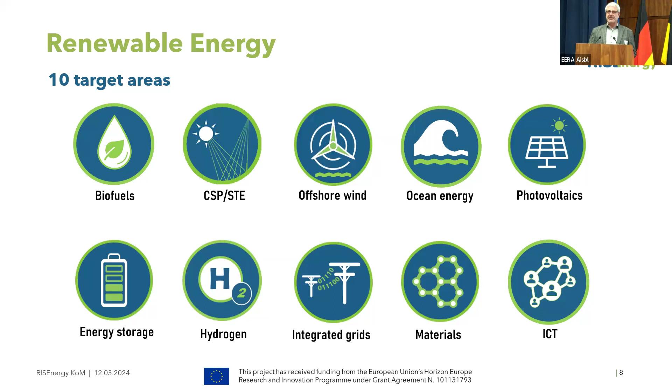There's not that much resources and budget foreseen for road mapping activities, as for example in other projects. So here we are challenged actually to spend this money and to make efficient use of our installations.

So with this project, we would like to initiate a more long-term coordinated effort, actually, with the aim to really scale up renewable energy technologies here in Europe.

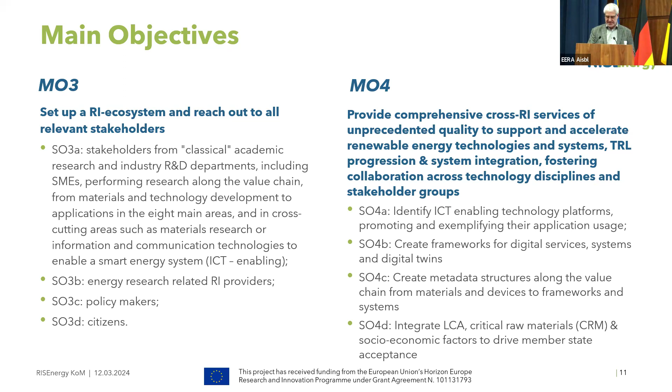Then also supporting activities are objectives 5 and 6, devoted to education and training. And finally, that group should become a kind of reference organization to guide the further development in these technology areas and towards the renewable energy system.

So how we have structured the project: we actually have objectives 1 and 2, innovation management and the user access, the transnational accesses, which are strongly linked, also supported by cross-cutting services in terms of ICT, but also in terms of best practices. Here we have a forecasting element, road mapping and perspective, and also it should guide actually the innovation activities where specific action is needed.

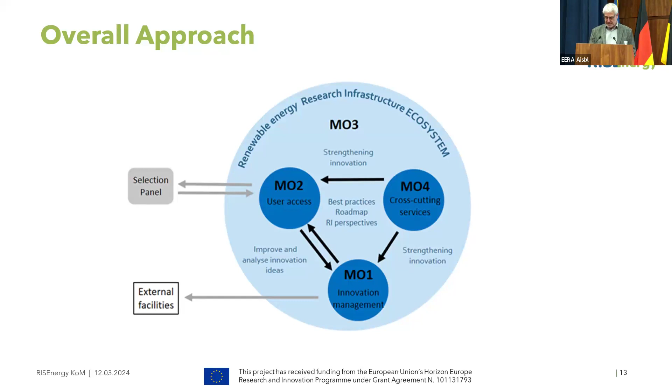Then we have this, which in total should contribute to objective 3: strengthening the innovation and creating the ecosystem. And by this, we have external layers. We have a selection panel from external experts, which help us select the best use cases and the best proposals for the infrastructure accesses. And we have an external advisory board guiding us strategically through our journey.

A little bit to the organization. We have participants, which are direct contractors to the European Commission. We have affiliated entities and subcontractors, and these are actually the participants receiving money directly.

Then we have an extended network, advisory board and selection panel as an outer layer. And here you see again the project core with the numbers here: 17 participants, 36 affiliated entities, and 15 subcontractors.

The subcontractors you see here to the different partners. With KIT as a coordinator, we take care of a bunch of subcontractors, and also AIT in Austria, IMEC and UCC.

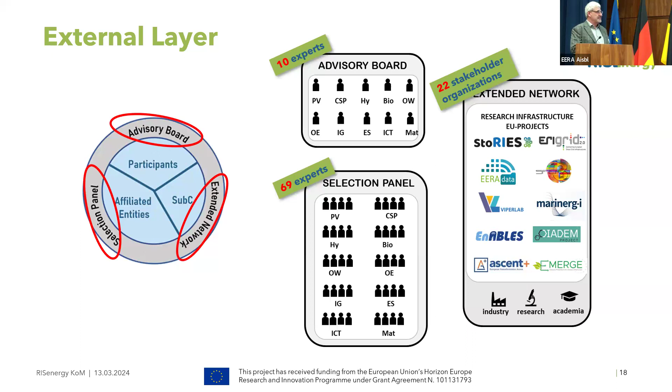And the extended network is a group of stakeholders who have actually expressed interest in following the project.

The management structure, just very brief. Of course, as each EU project, we have a general assembly of all the beneficiaries, the 17 partners. We have a steering committee, which is composed of the work package managers, but also the representatives of the different technology areas, so that we link the operational execution of the project to the content and the technology field.

Then the extended network provides input to the steering committee, and also the selection panel and the advisory board, to the overall project.

This is the RISEnergy project at a glance. And what we would like to do now is start introducing the research infrastructures from the different fields by having presentations from the thematic leaders of the different fields. But before we go to this, are there any questions on the general frame and setup?

We will also deal with this tomorrow in more detail, how we actually think of running that project. Unless you have comments or questions, then I would start to kick off now what I would call the scientific, technical, really content - the meat on the bone, I would say, of our project - that we move on to the research infrastructure presentations, task 3.

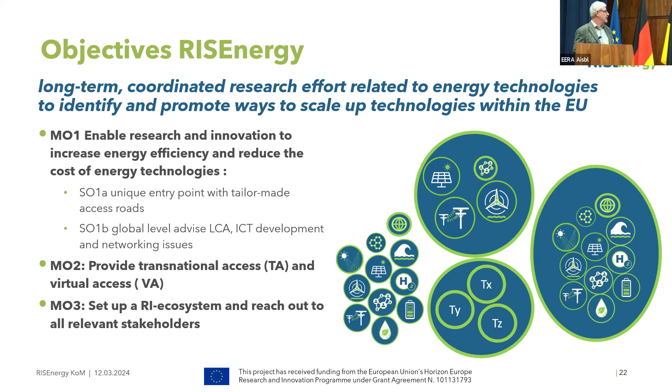So here are the different areas, and the first step of bringing areas and people together is actually getting to know them. That is the motivation for this afternoon, that the thematic leaders of these different areas - here are the 8 technology areas, but also the cross-cutting issues of materials research and development and international infrastructures - present what is in our catalog of infrastructures, not going into each installation or unit, but summarizing the main challenge in the field and how these infrastructures could contribute to solving them right now. Also as a kind of inspiration for the coffee breaks and the networking dinner this afternoon. I hope you take this invitation and actively participate in developing this understanding further.

So with this, I hand over to the first topic. It's Ivan Gordon on photovoltaics.

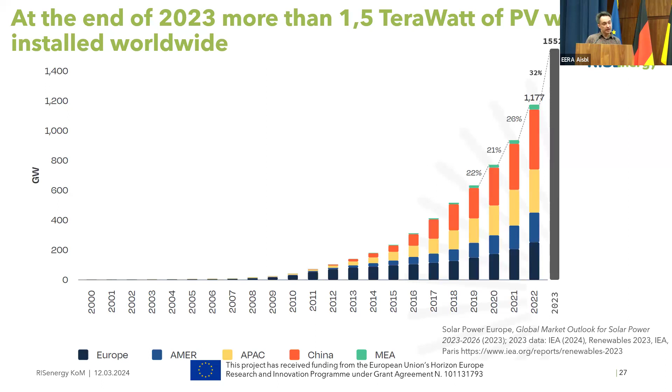And that has, of course, led to massive installations worldwide. Here you see, as a function of the year, the total amount of PV modules that were installed worldwide, so the total capacity. We see that at the end of 2023, worldwide, there was around 1.5 terawatt, so 1,500 gigawatt of PV capacity active. You see that especially in the last years, this increased very rapidly with rates of 20 to 30% extra installations per year.

If we look at the technology behind these PV panels, we can say that currently around 95% of PV panels are based on crystalline silicon - meaning crystalline silicon wafers as the active absorber material. The other 5% of PV modules are based on so-called thin film alternatives, where instead of crystalline silicon, you use, for instance, cadmium telluride or copper indium gallium diselenide. But in this project, we focus on crystalline silicon mostly.

And so now I will go through quite quickly a few of the main challenges we are still facing. Because often we hear people saying, okay, photovoltaics, it's very cheap, we already have a very large production, so it seems to be a mature technology - everything is probably already done. What is there still to do in terms of research? Well, there is actually quite a lot to do.

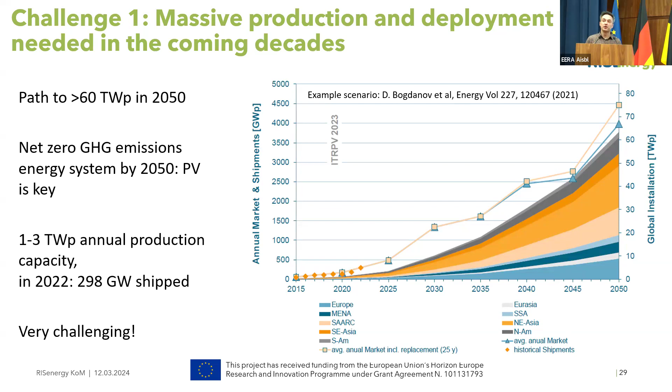The first challenge we are facing is that we have now around 1.5 terawatt of PV worldwide installed and active. But we know that to become climate neutral by 2050, or perhaps earlier, we actually have to go to 50 or 60 terawatt. So we are only at the start, and we have less than 30 years to go from 1.5 to 50 or 60 terawatt. That means the annual production, currently around 300 gigawatt of PV modules per year, has to probably go up in the coming years by a factor of 5 to 10, which poses a lot of problems, especially logistically, but also in terms of where we are going to install all these PV panels. Especially in densely populated areas like Western Europe, it's not always easy to find a lot of space.

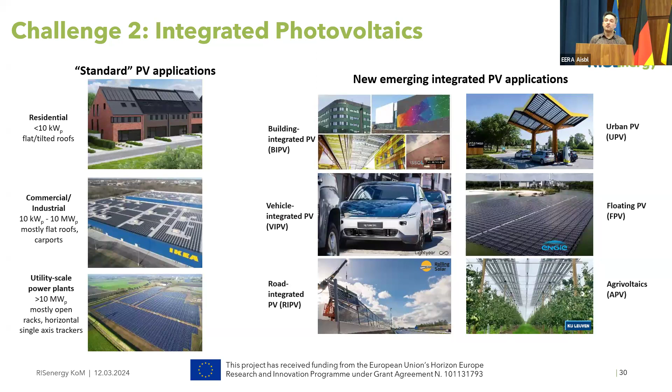Also something that is attracting a lot of attention is so-called agrivoltaics, where you combine agriculture with energy generation by PV. The main thing here is that you use a certain area for multiple purposes, including electricity generation. Then a third challenge, and this is really one of the main ones in my view, is sustainability. We have to start even more massively than what we are doing today, producing a lot of PV panels.

This poses a lot of problems in terms of sustainability and material usage. On the one hand, we have to think about recyclability. We can recycle the current PV modules, but it's still a difficult, complicated process that can also be expensive. So we have to think about, can we design our PV panels better in the future so that they are easier to recycle? But also we are consuming a lot of materials.

I give here the example of silver. A crystalline silicon PV module typically contains a few grams of silver, because of the metal contacts of the solar cells. A few grams doesn't sound like a lot, but since we are producing roughly 1 billion panels per year, this corresponds to thousands of tons of silver. At the moment, we are already consuming around 15% of the total silver produced per year just for PV alone.

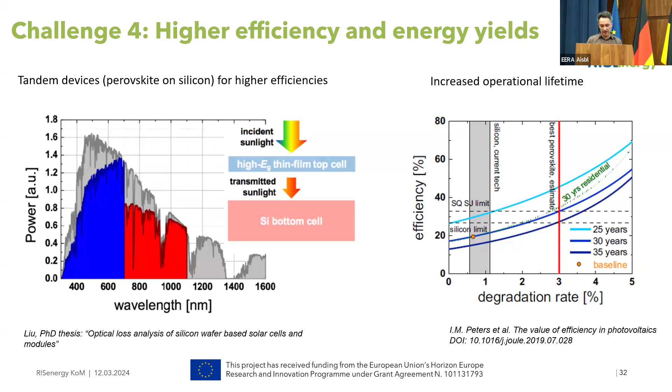Of course, we also have to look at the operational lifetime. We have to increase the lifetime of the devices so that they generate more electricity during that lifetime. So both are needed, higher efficiencies and higher energy yields, to go to even further lower costs.

So how do we address that now in the project? We have 4 research infrastructures that are fully dedicated to PV, and also a few others which are cross-cutting, where PV is involved. With these 4 research infrastructures, we focus on crystalline silicon and cover the whole value chain, including going to the tandems. This will help speed up the necessary developments. Basically, with our research infrastructure, we can address these 4 challenges that I have just shown you.

So we can quickly go through them. We have 2 research infrastructures, one in Norway and one in Turkey, where we focus on the silicon solar cells. In Norway, we look at the material, the silicon material itself. There is still lots of room for improvements there.

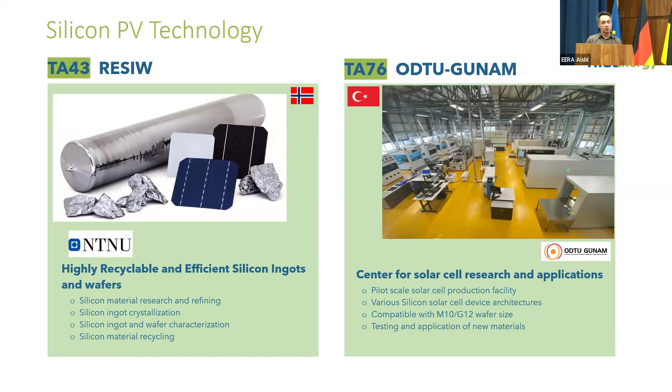And in Turkey, we have a very nice pilot line where we can make all kinds of crystalline silicon cells and even modules.

Then at Energyville here in Belgium, this is my own lab, we will focus on silicon-perovskite tandems, the next generation where we put a thin film perovskite material on top of the silicon to reach efficiencies above 30%.

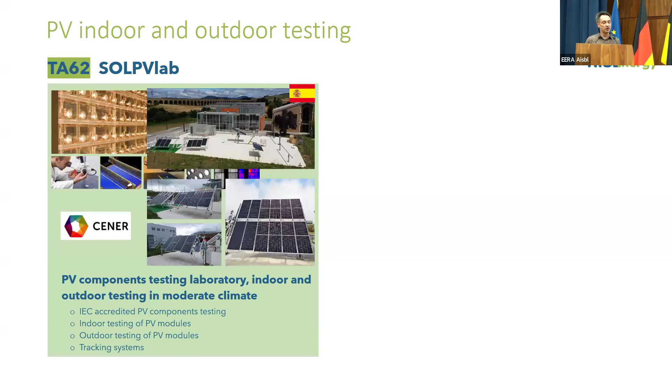And then we also have the SOLPVlab from CENER in Spain, where we have state-of-the-art indoor and outdoor testing, which is very important, especially for all the different applications appearing in the market. So that's a short summary for the PV part of RISEnergy.

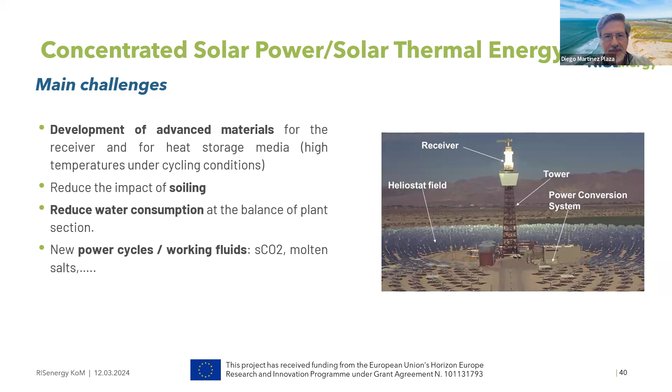We want to integrate this technology into industrial processes, so we need to improve the modularity and integrability with other energy sources.

The modularity has a reason. Normally for steam turbines, the bigger the turbine, the higher the efficiency, so these plants make sense going to big size, hundreds of megawatts. We need to develop modular technologies so you can build smaller plants without compromising global efficiency.

All in all, we need to decrease LCOE. We are aware that we need to reduce the operation and maintenance cost and the capital cost. At this point, we are at the beginning of our learning curve because there is not yet a mass deployment of this technology, so we have high potential to reduce capital cost. Last but not least, we need to improve reliability and performance.

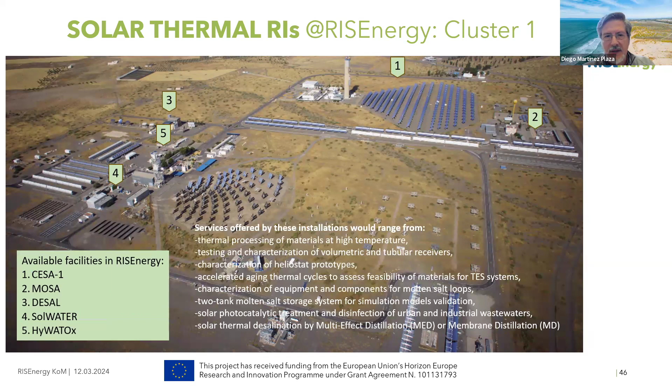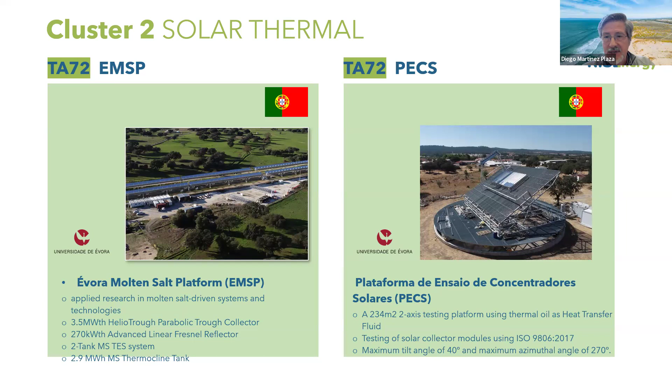At the IMDEA Foundation, they offer three facilities: the High Temperature Processes Laboratory for synthesis and characterization of solar materials, the Solar Simulator composed of xenon lamps, and a small power tower for testing receivers and processes. CENER in Navarra is offering a simulation environment for solar energy systems, relying on open source software called Tonatiuh, and a CST library developed on the basis of Modelica.

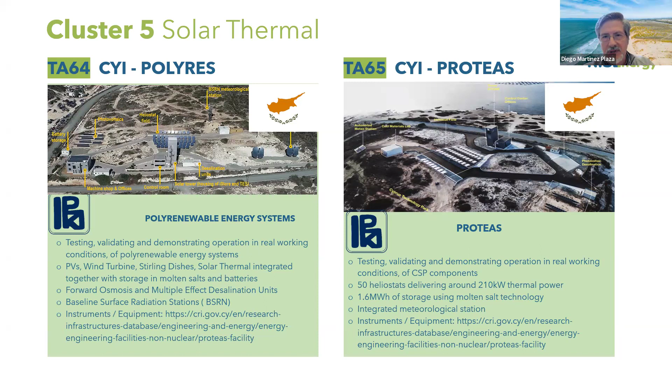In Cyprus we have two very interesting facilities. On one side, regarding integration with other renewable sources, PolyRes is able to test, validate, and demonstrate in operational working conditions poly-renewable energy systems, integrating solar thermal, photovoltaics, wind turbines, Stirling dishes, and also energy storage systems. It's a very interesting application. On the other side, Proteas is a typical power tower facility for testing receivers and applications.

There are also small solar furnaces for materials treatment and the study of advanced materials, and the MicroSol'R, a small parabolic trough system to study different components.

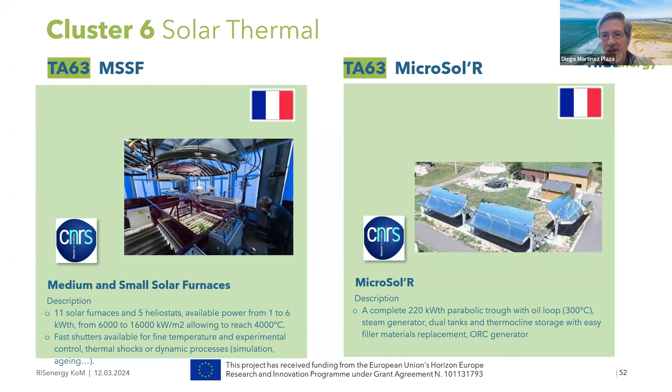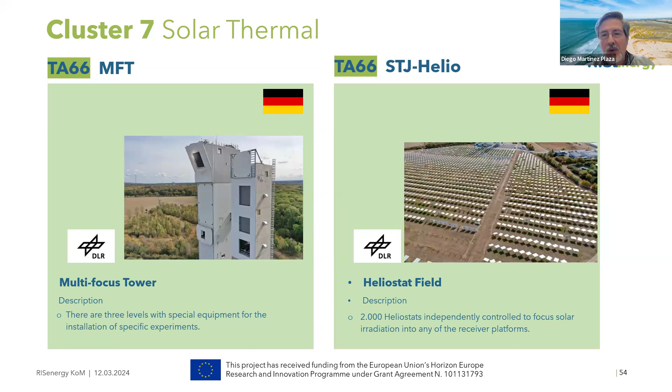The other tower, on the right-hand side, has three testing rooms and is able to test several experiments at once at different levels. The solar field has 2,000 heliostats, which deliver power to any of the test rooms in these two towers.

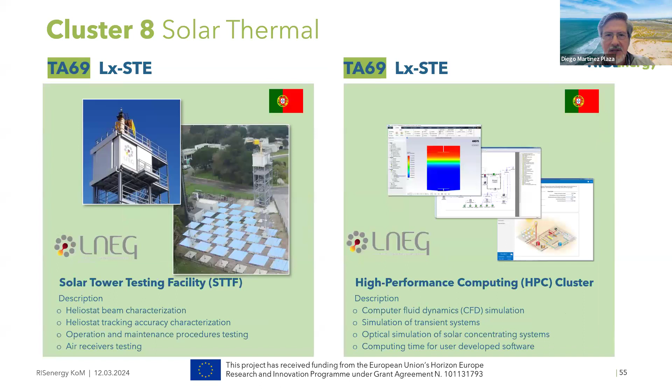And last but not least, the Portuguese partner, LNEG, is offering a solar tower for testing of receivers, a high-performance computing cluster for modeling computer fluid dynamics, particularly for the working fluids in solar applications. The last facility they are offering is the Laboratory of Solar Energy, where you will be able to carry out optical characterization of both reflectors and absorbers, work on measurement of solar radiation, and also the testing of solar collectors. That is the collection of facilities we are offering for access in the CSP STE community for RISEnergy. Thank you for your attention.

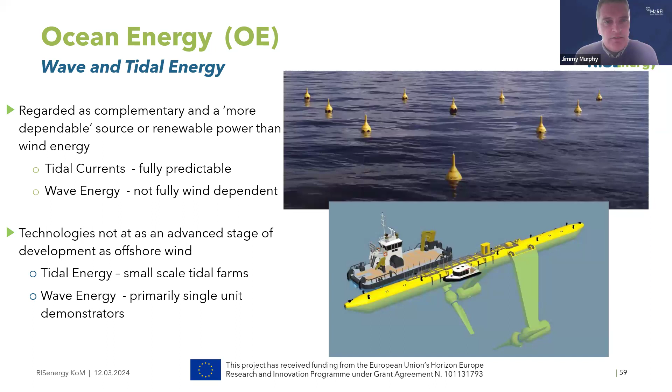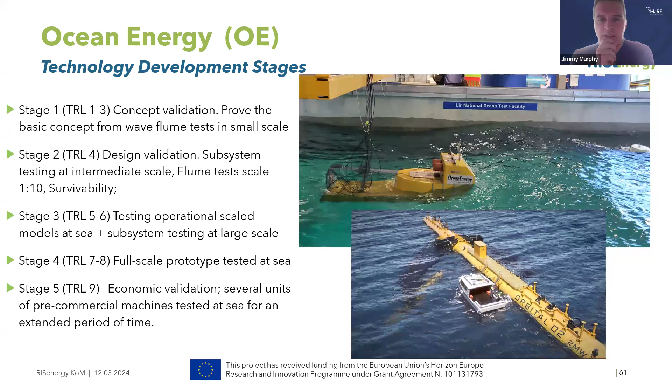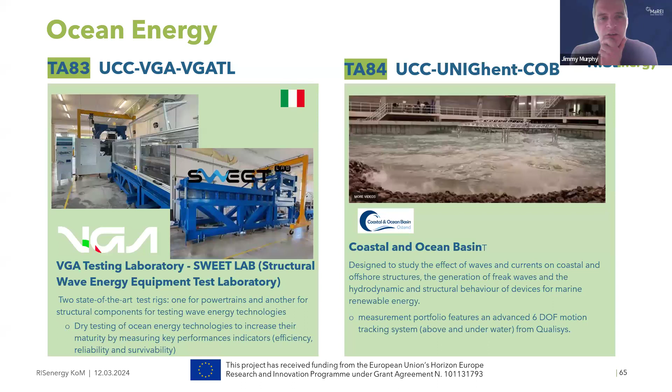So that covers everything in relation to ocean energy. I'm happy to take questions now or later. Thanks.

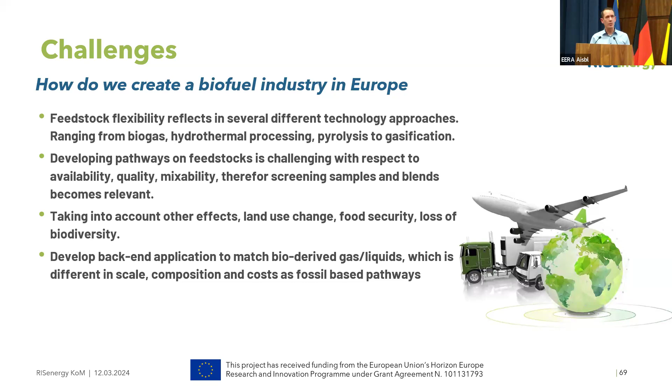Within our biofuel transnational access, we have 6 offers. There's also one international from NREL, but that will be presented later. We have LNEG in Portugal, we have TUBITAK in Turkey, the Netherlands at TNO, we have RE-CORD in Italy, and we have DBFZ in Germany. And I think through these 5 or 6 organizations, we cover virtually all possibilities of going from a feedstock to a fuel.

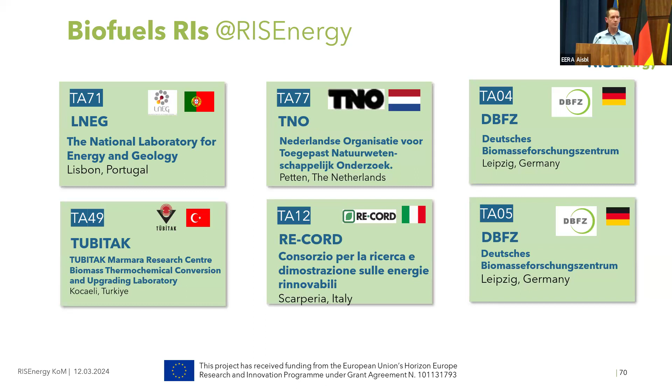So some details about these, what's on offer. For TNO, what we put in is really the gasification platform as a starting point to convert biomass feedstocks into gas, do the whole cleanup, test new catalysts, new sorbents, new liquids, and then go to fuels. And that's up to high pressure conversion, so we can do up to 100 bar, methanol, Fischer-Tropsch, etc. And also supporting this with extensive analysis.

For LNEG, they have the biomass and bioenergy research infrastructure, which is actually covering many different topics. So it's microalgae biorefineries development, where you can look into CO2 fixation, going all the way to biofuels, but also how to deal with wastewater, because this is a wet biomass. They also offer thermochemical pathways like liquefaction, pyrolysis, where you produce liquids which you can replace fossil liquids or maybe upgrade directly to fuels, and also gasification.

Another topic they look into is biomass deconstruction, so breaking biomass down into simpler molecules, using various approaches, high pressure ionic liquids, and they also have fermentation of sugars. And this is not the first generation sugars, but sugars that you obtain from lignocellulosic biomass, which is C5, C6 sugars. So all these different pathways are included.

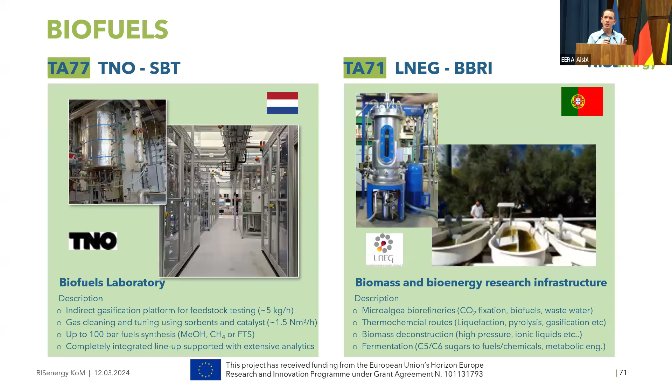Disintegration, again, is breaking down of biomass. They offer several batches going from small scale applications up to 100 liter units, and temperature ranging between 150 and 350 degrees C, so that's already quite severe. And they help you from proof of concept to experimental scale-up of carbonization technologies, liquefaction. So that's where you either go to biochar or go to liquids, or completely destroy the biomass with biomass disintegration units, and again, extensive analytical options. I think for all research organizations, the analytics are really dedicated to the work that we're doing, so that's also good to have.

TUBITAK is offering a fluidized bed and fixed bed pyrolysis and gasification setup. So this is more thermochemical conversion, higher temperatures, where you go to liquids or to gases that you then can further upgrade into fuels. They support you with an analysis department as well.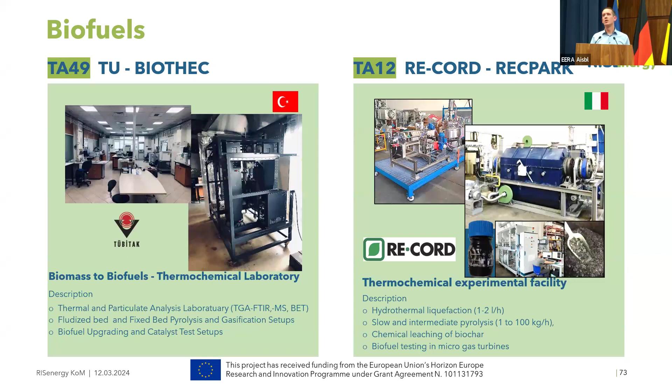So these 6 TAs that are on offer, they really cover the whole scope of different feedstocks. So you can use wet feedstocks and go to the partners, you can use dry feedstocks and there are other partners, but they can all help you to convert a given biological residue into a biofuel.

Oh yes, thank you. Okay.

So there's already a link shown to chemical energy carriers in the storage area. Now we move to the competitor of the previous presentation, offshore wind. Presented by Julian Balzen, is that right? Yeah.

Thank you. I think a lot of people are a bit surprised to see me because I'm not a scientist. So, but I think, as I understand, maybe Anthony Fraisse is online from DTU, my dear French colleague. So maybe he can support me if I say something wrong or not really precise. So please be indulgent with me.

So, offshore wind. I think I need to use this... yeah, the pointer, perfect. So let's back up a little bit.

Let's take some history. In 1991, the first offshore wind turbine was built in Denmark, which was quite a groundbreaking project at the time. That's 33 years ago right now, so maybe some of you weren't born. No, I think yes, I was born too.

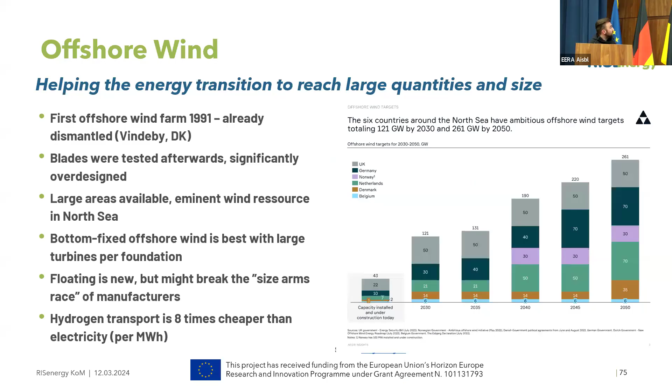To scale up turbine manufacturing, we also have to improve manufacturing processes, optimize supply chains, and of course reduce material waste. For that, collaboration between stakeholders and governments can facilitate the development of standardized components and streamlined manufacturing techniques. Second, there's installation for offshore wind farms at larger scales.

As turbine size increases, the logistical challenges associated with installation increase too. So we need to find innovation in installation methods - for example, advanced vessel technology, automated assembly processes, and investment in port infrastructure will be important, along with skills and labor training to support the growing offshore wind industry.

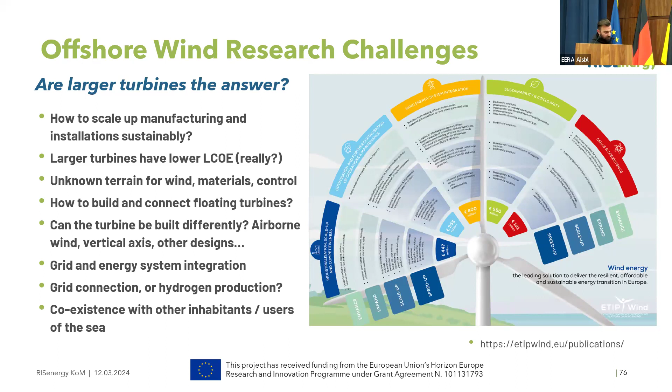Having said that, five infrastructures have been selected in the RISEnergy project for offshore wind. I talked a lot about the North Sea, but not all five infrastructures are located there. We have one, for example, in Greece, on Crete, which is a 100-meter mast with lidar, located in the Mediterranean Sea.

We have one in Nantes, France, which is a climatic wind tunnel. The one in Nantes can simulate a lot of climatic conditions, from -32 to +55 degrees, rain, snow, sun, etc. That's really interesting and impressive too, and it's located near the Atlantic coast.

The second one that I had the chance to visit is the DTU Material Lab. It's more focused on materials. It's quite impressive because of the fibrous content measurements, optical microscopy. So we are really dealing with materials there.

The third one, which I already talked about, is the one in Greece: a 100-meter mast with lidar, quite impressive too.

The fourth one is based in Sweden, at Chalmers, which has wind turbines with variable speed. And last but not least, the one based in the Netherlands, powered by TNO, which is a scaled hybrid power plant test facility with wind and solar.

Thanks, Julian. I think in all presentations there were already keywords coming through, from the system to the materials, aggressive environment, harsh conditions. I hope you were all able to make some connections to these things and also learn something new.

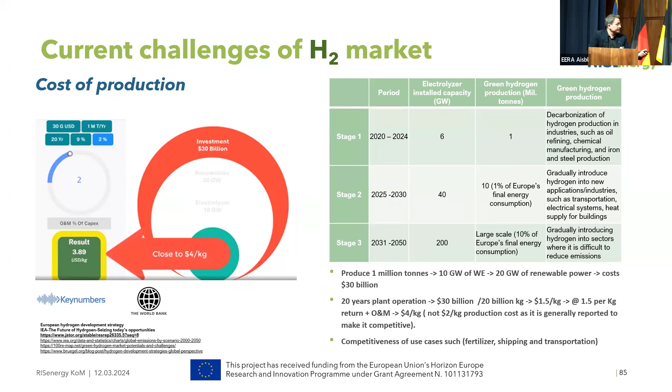And this is a big problem that we have to address in terms of the cost of materials and doubling of the production. And to tell you the truth, the way to do it is all through materials and accelerating on that. And that's where the hydrogen technology is basically focusing.

So in terms of infrastructure that we have in this project, a lot of that is from our organizations in Germany, and also 2 infrastructures in Italy. We have infrastructure in Rotondella, Italy, focusing on syngas and production of hydrogen. I talked about that a little bit in terms of the purification facilities and testing facilities there.

The Green Hydrogen Lab as part of CNR is also doing different levels of testing at the stack level as well as at the catalyst level and so on. And then at our facilities in Germany, some of the facilities we have are part of our living lab energy. This is part of the ICT stream in this project, but it's also heavily powered with the hydrogen facilities that I talked about a little bit.

We are also building accelerated robotic systems that are able to test new materials, specifically non-fluorinated materials, which will be a big hurdle for the industry to deal with in the next couple of years. Some facilities are virtual, for data augmentation and testing data that would be useful for supporting a lot of these activities.

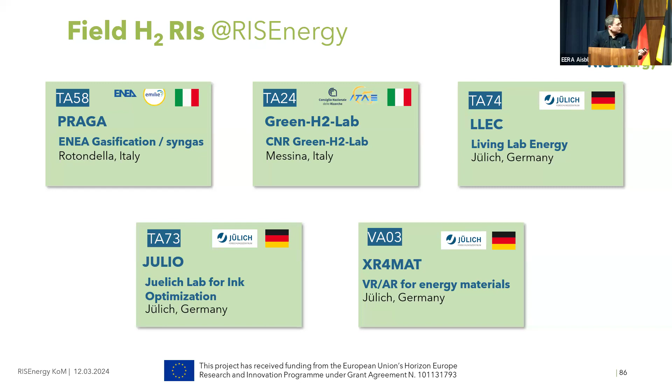So a few words about some of the facilities in Italy. On the syngas side, we have facilities that produce up to 40 kilograms of hydrogen per feed, facilities for testing different catalysts, purification of the hydrogen, and more, which is extremely important for the production side of hydrogen.

As part of CNR, the facilities in ITAE, the Advanced Energy Tech Institute, are more focused on testing stations, starting from a 5 kilowatt system up to 200 amps maximum current. These are typically sized for hydrogen production for maybe a few households. If you talk about 1, 2, or up to 10 megawatts, we're talking about a city of 300 people or 300 families.

The electrolysis can connect to the renewables in that sense, and the scale-up facilities are also part of that. The infrastructure in Jülich is pretty unique in the sense that the footprint of investment is huge in this region that I come from.

This region has seen an investment of 1 billion euros in September 2022 to convert all the coal mines of the region into hydrogen production. So we have facilities being built as we speak on production and storage. LOHC is the technology of storage that is mainly the focus of these facilities.

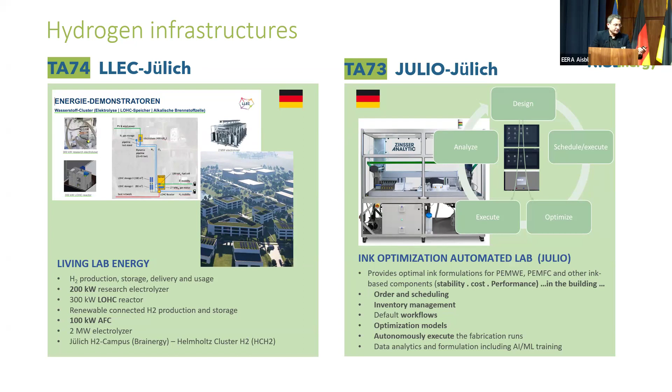This facility, as I said, is built, and eventually the end user will be able to formulate requests and send them in, basically building and testing some of the ink materials.

The last thing I want to talk about is the virtual facilities that we have built since 2021. It was part of another project as well. The way this facility essentially worked was as a virtual environment for visualization of data from different testing, for different purposes.

Initially it was used for education purposes, people go there and communicate about certain data and visualization. And then we saw industry needs around visualizing industrial testing.

For example, if you do stack-level testing using new materials, you should be able to augment the testing data in real time near the edge of the technology. That's what we moved our focus toward, on testing data, and we got millions of data points from industrial partners to put visualizations into the virtual rooms. With the facilities we had, we were able to augment that into the actual device.

This is extremely important. There is no model or digital twin added yet, it's just visualization of the data itself. So if you're sitting beside a facility with a 200-cell hydrogen stack, you don't see what's going on inside it. But if you visualize the data, you can see which cell is vulnerable to a certain kind of failure, so you can get insight right away.

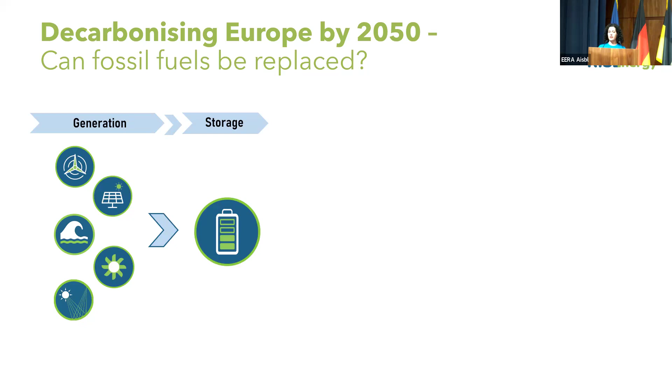Okay, it works. Let's talk about the challenges. One of the most urgent challenges of the energy system today is to minimize curtailment and maximize renewables utilization and integration. Energy storage is one of the main pillars to achieve this, because not only for electricity but also heat or other energy vectors, it's the only possibility to integrate renewable energy in a system-safe way into the energy system. And what we need is to secure our energy needs in the different sectors: transport, residential, and industry.

If we have a look at the state of play, we can say that batteries will certainly solve the problem of transportation. Electrification of this sector is very much advanced. There will be, for sure, other technologies that can help, for example hydrogen or fuel cells for specific applications. But this is a sector that is more or less solved now.

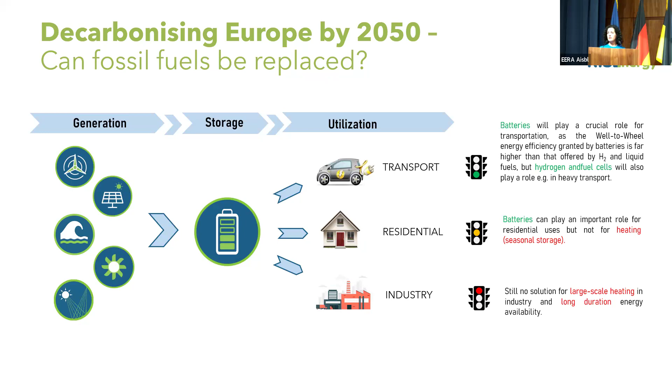But it's not the same for residential applications. Batteries can help to solve this problem, but there is still the problem of heating. And the same for industry. We don't know how to solve this problem now, because one of the biggest challenges to achieve the clean energy transition by 2050 is seasonal storage, long duration seasonal storage, which means we don't know how to save energy for the winter, because so far we have been using fossil fuels. And this has to change if we want to decarbonize Europe.

If we look at energy storage technologies, they can help us a lot to achieve this goal. Depending on the storage principle, we have different energy storage applications. For example, electrochemical energy storage, batteries - a very, very large portfolio of batteries that we have already. There is also chemical energy storage, like power-to-X, e-fuels, hydrogen, ammonia, reactive metals. We also have the possibility to store energy as thermal storage - heat, phase change materials, molten salt. We have mechanical storage, like pumped hydro, compressed air energy storage, liquid air energy storage, flywheels, and so on and so forth. And we have also electrical energy storage, like superconducting magnetic energy storage or supercapacitors.

As you can see, we have many technologies available, but if we take into account that the future energy system will be much more decentralized, disaggregated, and multi-vector, there is not only a single technology that can solve all these problems and applications. In some cases we will need a combination of them, and this is what we call hybridization for energy storage - the utilization of 2 or more energy storage technologies together at a system, device, or material level to provide technical and economic advantages beyond what any single energy storage technology can provide.

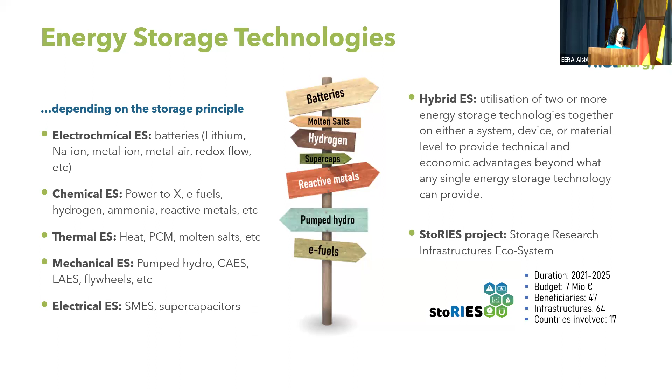This is what we are looking at in the StoRIES project. It's a research infrastructure project in the field of energy storage, and the key research priority of this project is to find hybrid solutions for the different applications we have in order to store energy. This project is already ongoing, and similar ones may exist in your own field. Let's have a look how we address that within RISEnergy.

The third research infrastructure that I would like to show you is dealing with chemical and electrical energy storage. It's based in the University of Perugia in Italy, and in this case, they have a test bench for reactive metals, steam oxidations for hydrogen production, for example, for reactive metals like aluminum, but they also have other activities in fuel cells and power to X.

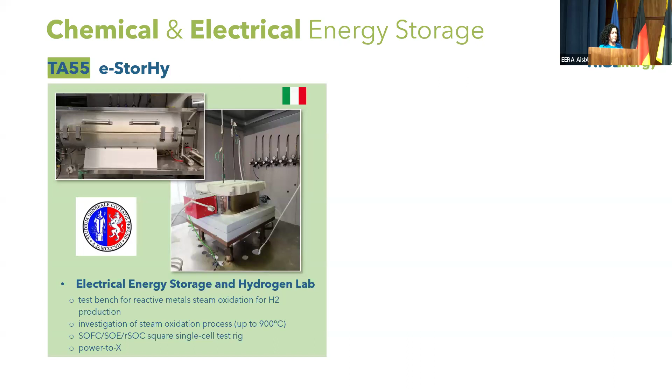Then we have 2 additional research infrastructures in the field of thermal energy storage. The first one is situated in Messina in Italy, at the CNR, called the Center for Thermal Energy Storage and Conversion Technologies. As you can see here, you can also perform characterizations from materials to system level, or many other experiments.

In addition to this one, we have another one in Karlsruhe at KIT called the Karlsruhe Liquid Metal Laboratory. This is a test of a first of its kind heat storage system with liquid metal loops for hydrogen production from methane or biogas above 100 degrees, for production of solid carbon and oxygen from CO2 from air, for example, and many other kinds of experiments.

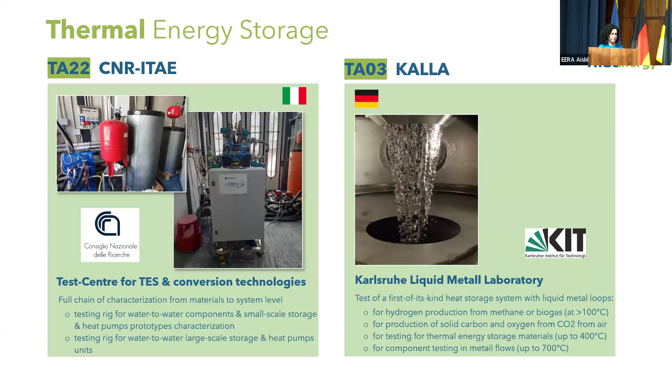And in this case, if you have questions about this technology, you can directly ask Giovanna because she's here and will answer all the questions regarding this technology. It's the only one that is here today, so from the energy storage side. Okay, that's all. Thank you very much for your attention. And if you have any questions, just let me know.

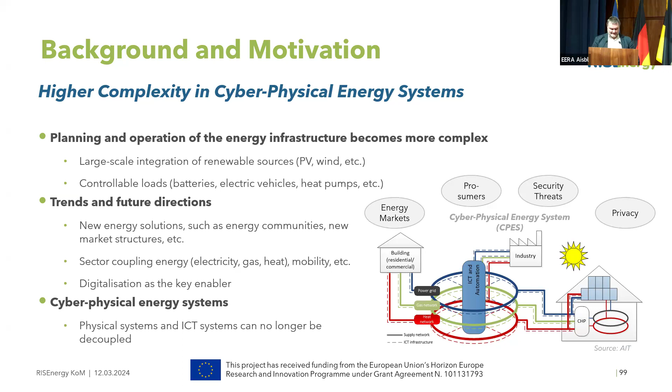So nowadays we call it a so-called cyber physical energy system, and we cannot analyze the individual areas independently. When we always look at the infrastructure itself, we always see it from 3 different angles. From the system point of view, here we have different challenges: urbanization, aging infrastructure, electrification of mobility, and so on, distributed generation.

But we also have lots of technologies that we need to integrate from the technology side. Power electronics plays an important role in that area, with smart converter platforms and so on, communication, automation, condition monitoring, and so on. But also we need to look at the market side - this is also a point that needs to be looked at.

At the end, we are providing here different infrastructure in that field that looks from 3 different angles. The big question is how to plan and operate such an integrated system.

We can look back on a very long collaboration. Peter already mentioned that ERIGRID 2 is an ongoing project, similar to the StoRIES project, also a research infrastructure project providing transnational access. We go back to 2005, where we started a network of excellence in the FP6 program with DERlab. So lots of our members in the integrated grid part are DERlab members, and DERlab is also part of the consortium.

We had a couple of different research infrastructure projects mainly providing transnational access, and in ERIGRID 2 we started with virtual access as well. This is also what we have here: 2 infrastructures in that area focus on the virtual infrastructure. But we are offering in the integrated grid area 10 different infrastructures.

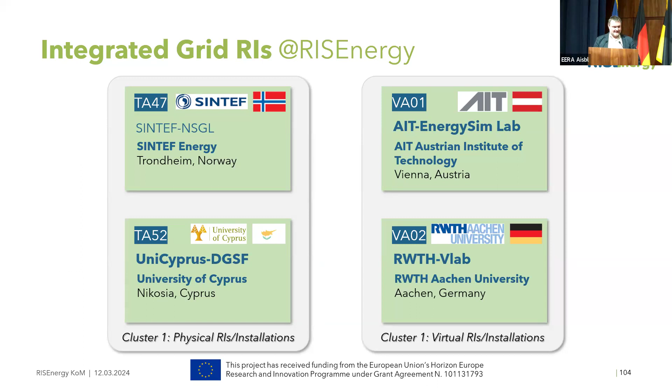8 of them are physical ones. We have spanned different laboratories from north to south, east to west, more or less across Europe. Different research and technology organizations and universities are offering these infrastructures. We also have 2 virtual infrastructures involved, and I will briefly introduce all 10 installations, both physical infrastructures and the virtual ones.

The first one is the infrastructure from my institution, the AIT. We call it Energy Labs. There are 3 different infrastructures involved. The Smartest laboratory is a kind of power system, smart grid testing environment for inverter-based DER systems, where we can test the integration of different converter and inverter platforms.

under realistic grid conditions. We have a thermal energy storage system lab, and also a new facility currently in realization, which combines different technologies where we can analyze the grid integration of different generators, consumers, and storage systems. Another lab is located in Athens, Greece, from the National Technical University of Athens.

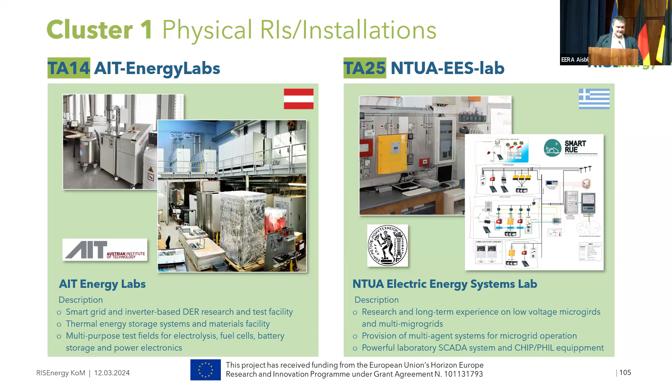They focus mainly on microgrid-based approaches and multi-microgrid approaches. They have powerful physical equipment, but also simulation equipment. In our area, we use quite a lot of real-time simulation systems, meaning we can emulate the power system infrastructure in real-world clock time, and connect it with physical equipment like converter systems, but also ICT equipment.

Then we have two additional laboratories: one from Sofia, which focuses mainly on power system stability. Stability is very important in the electrical grid, so we need to ensure the 50 hertz is closely followed across Europe. Smaller deviations can harm the overall system. Here in Sofia, at the Technical University, we have a laboratory that focuses especially on system stability.

In Romania, in Bucharest, we have the Microtel lab. They focus on measurement equipment. It's very important to identify and know what's going on in the grid, in the infrastructure itself, so we have this facility from Bucharest.

Then we move further north to DTU, with the SYSLAB and the Risø hybrid power plant approach. Here we have a powerful laboratory that integrates electricity and thermal systems together, at the grid level on the Risø campus, where they can analyze different control and operation schemes together with hybrid power plants.

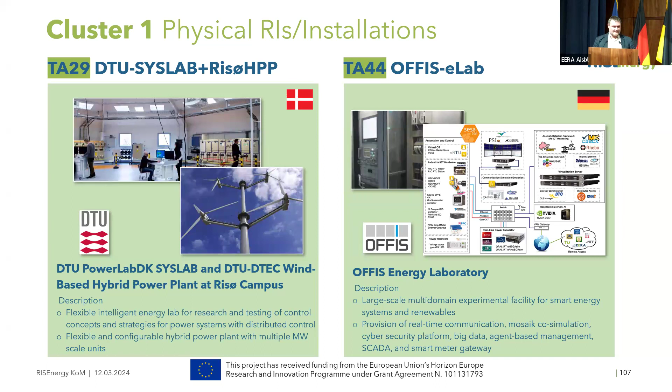Then we move a bit south to Oldenburg in Germany, to OFFIS. This is a very specific laboratory because it doesn't provide physical hardware equipment. It's a simulation-based laboratory with powerful ICT equipment. They can analyze large-scale distribution systems and energy infrastructure systems, also in real time, together with corresponding management and operation approaches.

Then going up to the north, this is the northernmost laboratory, SINTEF with the National Smart Grid Laboratory. Also a powerful laboratory for testing converter and inverter systems. They are very specialized in power electronic components and the integration of these components into the power grids.

And we move far to the east and south with the University of Cyprus. Here we have a nice laboratory that focuses on the integration of distributed energy resources, especially photovoltaic systems, and their behavior in the power system and distribution grids. They focus partly on micro and nano grids, as well as energy management approaches.

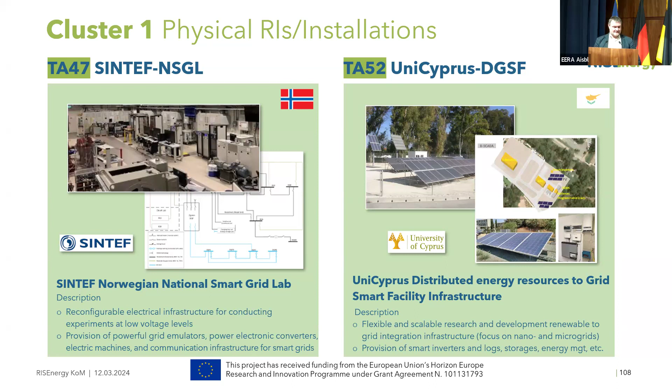As said, this is more specific to RISEnergy, because we don't have so many virtual laboratories or virtual research infrastructures. There are only a few, and two belong to the cluster of integrated grids: one is the Energy Sim Lab from AIT, and the other is the VLab from RWTH Aachen. Both are kind of simulation-as-a-service approaches where users can connect online to a simulation platform and run different kinds of power system or integrated energy grid simulations.

So that's a brief overview about the integrated grids part.

Yeah, thank you, Thomas. I think that fits as a good introduction to the communication part, which comes on top. Michael, please.

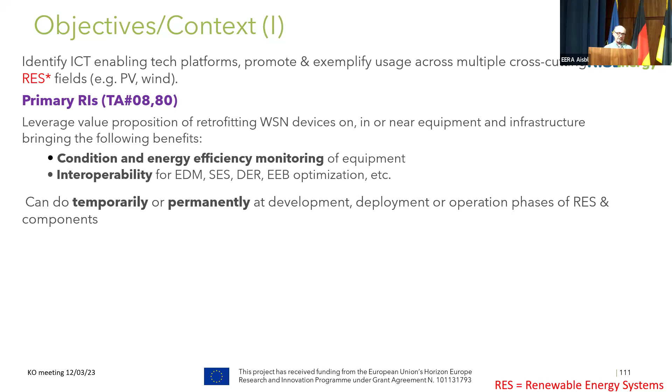Of course, further in the life cycle, we can also install these things permanently, so during the operation of the equipment and infrastructure, we can monitor the performance for efficiency monitoring, predictive maintenance, and preventative maintenance of that equipment. This will help us enhance the performance and reliability of renewable energy systems.

But there's a big impediment, and that's that these wireless sensor nodes need much better battery life than what they experience at the moment. At the moment, a typical wireless sensor node will only last 12 to 18 months. That's fine for short-term deployments, but if you're installing these wireless sensors in remote and difficult to access areas, that's not going to cut it, and it's going to be difficult for you to go back and replace these batteries and get these things up and going again.

The solution we're bringing to the table is energy harvesting related technologies, but not energy harvesting as you would know it. This is micro power energy harvesting—taking tiny amounts of energy, heat, vibrations, thermoelectricity, and converting this to electricity, which will supplement the operation of a battery.

It's almost like the Stories project—they talked about hybrid storage. We also need hybrid storage at the micro power level. We want to use a primary battery, but instead of the battery lasting 12 or 18 months, we want that battery to last 10 or 15 years. The only way we can do that is to harvest using tiny PV panels or thermoelectric devices or vibrational devices, harvest these energies, and for most of the life of these sensors, run them from these ambient energies rather than depleting the battery.

So much of the work we're going to do, hopefully in this project with the feasibility studies, is to talk to people like yourselves and the people who will serve your research infrastructures and understand how we can avail of this energy harvesting technology at the micropower level. How can we retrofit long life battery sensors into our infrastructure so that we can enhance the performance, the reliability, and indeed the interoperability of these systems.

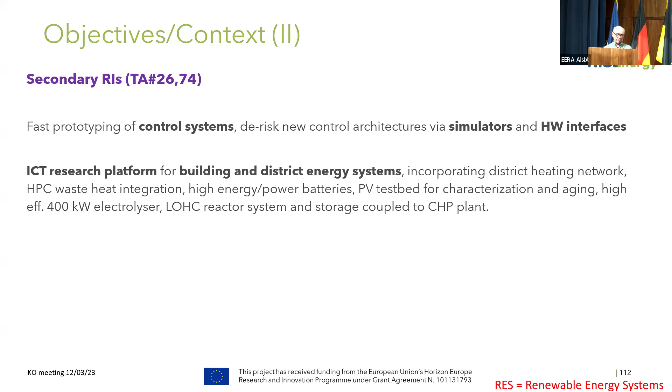Now there are other research infrastructures that relate to ICT as well. In fact, as we get to know each other, we'll find there are many ICT related research infrastructures already in our ecosystem. It's just that we don't call them as such because it's a secondary element rather than a primary element. But looking through the proposal, 2 stood out to me: TAs 26 and 74. We'll look at those in a few moments. What these are really about is bringing in control systems, de-risking control architectures using simulators and hardware interfaces, research platforms for building energy district systems, incorporating a multitude of renewable energy technologies so that we can get all these systems to interact and operate on an optimal basis.

So let's get into a little bit of detail then. The first research infrastructure we're offering is from HMU, the Hellenic Mediterranean University, based in Greece. They're giving us access to 2 research infrastructures. One is called iMerge, from an FET graphene flagship, relating to printed electronics and photonics. You might ask, what's the relevance of this? Well, in many cases, printed electronics and photonics enable us to make very, very small, very, very resilient, very adaptable, and very, very low power sensors.

The second research infrastructure they have is called IEECC, the Institute of Environment, Energy and Climate Change. What they have here is a research infrastructure relating to energy systems for renewable energy technologies, encompassing a wide variety of technologies such as PV, microgrid storage, vehicle to grid, and so on, and they're enabled to do environmental assessments associated with this. So the support offered here can be either to use these as standalone or maybe to integrate them together, combining the capabilities of the 2 research infrastructures. And indeed, already from talking to some of you during the coffee break, I think one of the early things we'll discover is that we may end up doing joint research.

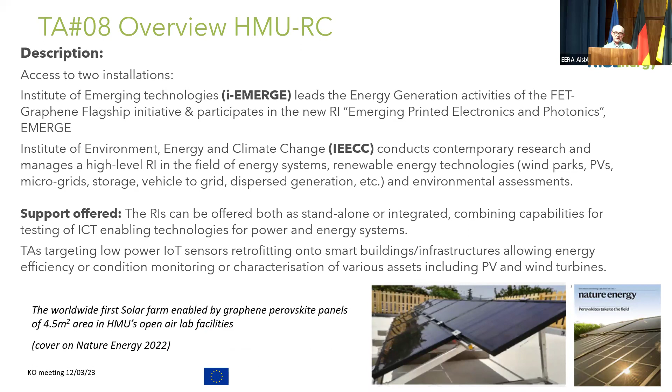Now, the HMU already have some infrastructure available, as has been indicated with IEECC. They already have some high efficiency PV panel systems available, and they're in a very good starting position now for us maybe to retrofit some sensors and see how we can further guide and enhance the development of these types of PV panels.

This is just some detail regarding the two services offered. As I said, i-EMERGE relates to printed electronics. IEECC is an ecosystem of microgrid components where we can do a lot of ICT experimentation, testing the interoperability and controllability of these systems. Okay, on to UCC.

This is my home turf. I'm resident at Tyndall National Institute, which is a research center similar to Fraunhofer, but our parent organization is University College Cork. Jimmy Murphy, who spoke earlier on leading the ocean energy activities, is also from UCC. We are Ireland's largest ICT research centre, with 600 people.

What we have really is we can offer the technology to enable us to design, retrofit and operate so-called wireless sensor nodes, putting them on, in, or near equipment and infrastructure. We have everything from materials to devices to processes, much of it being semiconductor based or MEMS based. MEMS is microelectromechanical parts, and also doing more and more integration, taking various technologies and integrating them together into these miniaturized devices.

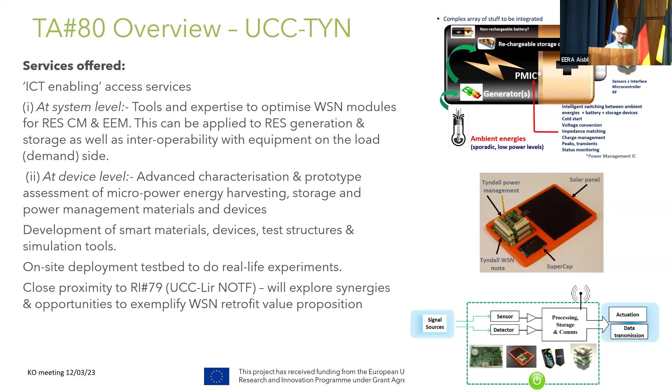And one thing I do know from doing the Enables project is there's nothing like examples. We can talk conceptually about all the ideas that we have, but it's only when we have some real life TAs done, and we've put these on the web and advertised in social media, that we'll see what the value proposition is. So Jimmy and I will be working to try and get some of these feasibility studies done early so people can understand what we're talking about.

Now, that's just two that I found. I bet there's probably 20 or 30 more with some ICT element. Our mission here is to try and bring the ICT, power electronics and renewable energy systems worlds together and see how we leverage from each other and deliver the impact that Peter talked about at the start of this project. Okay, that is it, thank you.

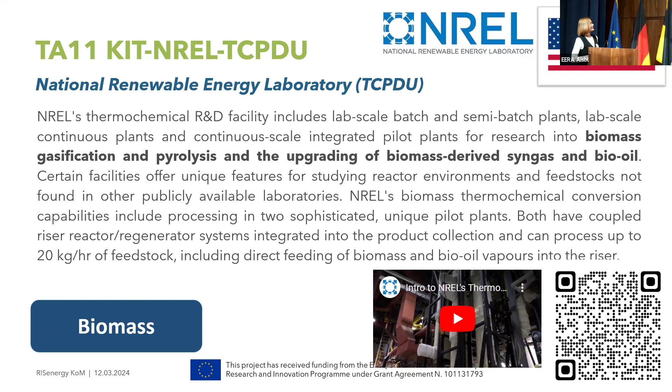Okay, we go to the next one. It's in the States, and it's a biomass infrastructure dealing with gasification and pyrolysis and upgrading of biomass-derived syngas and bio-oil. Again, the same situation - I looked for some information about this place, and what I found is a very nice movie. For people who are interested, you can just go watch it to see what can be done in this facility.

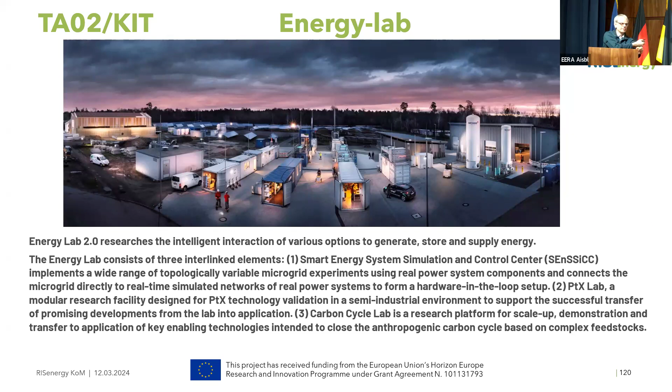Okay. The next one I choose was already presented. I think it's on Sardinia, X to liquids, from Bernd, I think. And it is basically you have different resources, CO2 from the air, but also plastic and hydrogen, and you try to make fuels out of it.

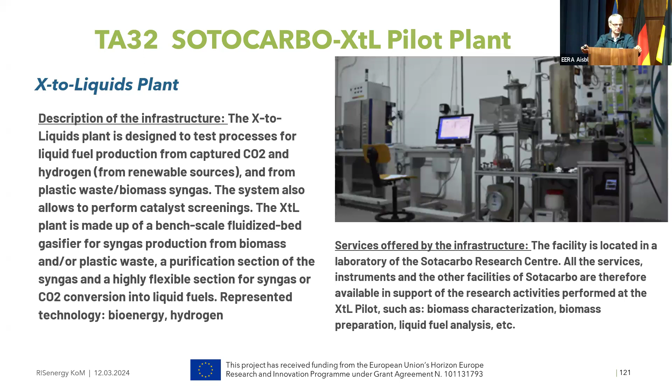And it maybe does not belong to this presentation here, but I think plastics is an extremely important thing where this whole community could contribute in the future, either with materials research or with something else, to push for new solutions. Plastics is everywhere in our environment, it's kind of poisoning us. Researchers in the past said it's inert, it doesn't harm us, but it seems to be not true. For example, this PFAS initiative. And I think if this community makes some documents, papers together with the industry, white papers, this could help to establish new infrastructures, for example. We have the knowledge from all sides, from ICT, from materials, from AI databases, and this might help. This is why I have this selected also.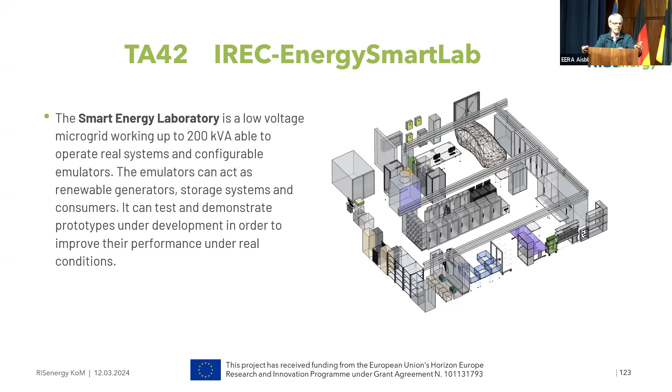This is another point here. Many of our facilities are very similar. And so in principle, what I would like to have is what is very special with your facility? What kind of research can only be done on your facility, and cannot be done in another RISEnergy research infrastructure. And if you set up the websites, you should somehow inform the users on this. What is the uniqueness of your facility?

Okay, we had this, Jimmy Murphy discussed this, the test center from IREC, right? You're right, okay, I don't discuss this again. This was just to show you, okay, we also have large facilities in size.

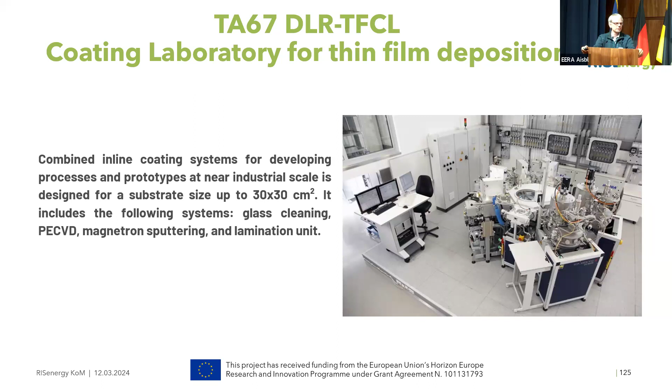Okay, and then we have a typical materials research infrastructure, coating laboratory, for nearly industrial scale design, 30 by 30 centimeters, includes glass cleaning, then what is PECVD? It's plasma enhanced chemical vapor deposition, something like this. Magnetrons, sputtering, and lamination units.

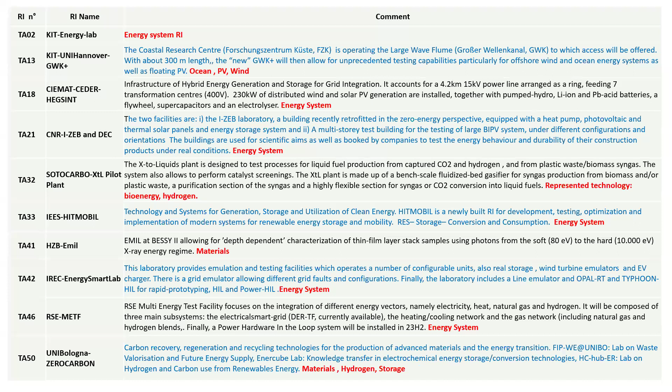Okay, well I made here a long list. This is basically from the proposal, and then in red there are my comments where I would put this to. And you see there's a lot of energy systems, and here only a few materials research devices. On the second page is many more materials, and so we have some clear materials facilities here. Many of those were shown really, therefore it's a waste of time if I go through it again.

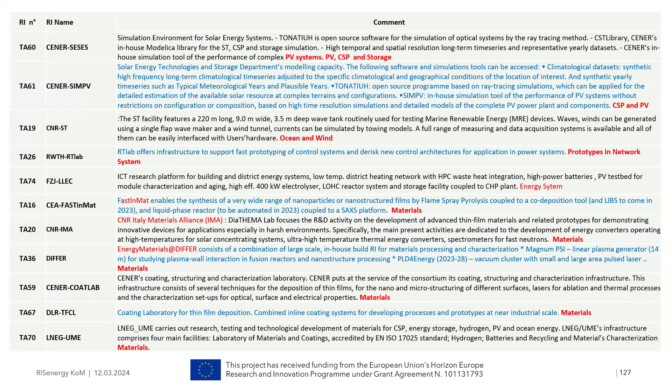But okay, so now I talked a little bit, and finally I would start to bring you into the discussions. The first thing is, as a summary, we have 7 energy systems research infrastructures, about 6 clear material devices, and a lot of mixtures, PV, CSP, ocean energy, wind energy, and so on. But for me, when I went through the document or also on the websites of the different research infrastructures, it's a little bit confusing. We need a proper structure on the internet, in my opinion, to order these research infrastructures. Certainly we need keywords, and this is clear, but maybe also a structure like hitting a button and say, okay, I would like to have research infrastructures combining PV, CSP, materials, whatever, and we should discuss this, how to do it, and who has good examples.

When we drafted the proposals, I remember that I had a problem, and then some of you came and said, okay, we have a perfect solution. This worked very well in drafting the proposal. So we rely on you, or the coordination team relies on you.

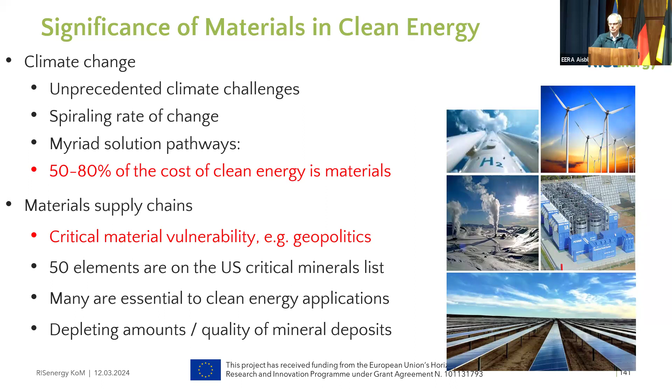I'll go into this presentation now. Materials are simply significant — for example, Airbus planes for passengers. The real difference between planes from the 40s and today is that we have composites, new materials. That's the reason why they are that big, and many other areas. The advancement in hydrogen production from electrolyzers is also related very much to catalytic materials, and so on. So materials are important, and we need to do something.

And since a couple of years, we try to use AI in addition to modeling, bring everything together, and we can really accelerate the development of new performing materials much faster.

What we need here is modeling tools put into an AI operating system. We also have automized synthesis and characterization, and we feed the AI system with the results. Then the modeling is improved by the AI system with more real results, and better performing materials are found more quickly.

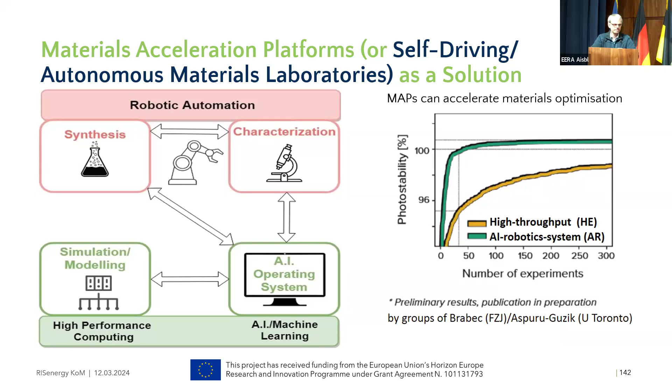This is just a proof of what these materials acceleration platforms can do on materials. But this is not the real challenge. We can do this, and it's done in Erlangen, which belongs to the Forschungszentrum Jülich. Here's the laboratory, and I'm aware that it's the most advanced MAP, at least in Europe, maybe there are others in Canada.

Then there are other projects focusing on a larger challenge: making new devices with new materials. A battery is a very complex thing, and I think nobody really understands what's going on inside of a battery. It's a perfect field for materials acceleration platforms, because you don't need to understand why a material performs better—the result is just better. But the challenge is to bring all these materials together in a device.

The BIG-MAP is about batteries, and it's about how to build this battery together with new materials. The project is not to find new batteries, the project is to find a way forward on how to accelerate research for finding new batteries faster. That's the difference, and the challenge is to do this 5 to 10 times faster. What's needed is a large community of research centers, but also the knowledge of the industry on how to assemble these batteries. And now, Courage, I stole some of your slides.

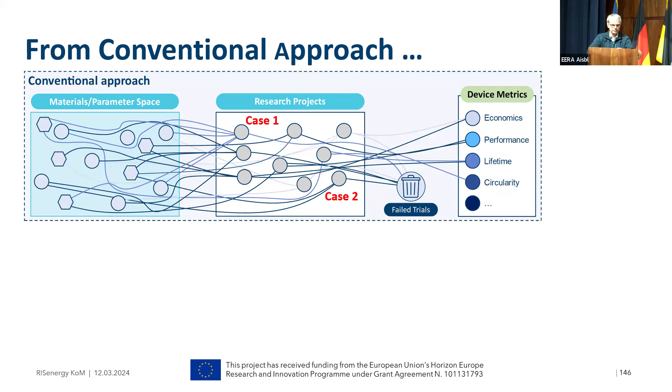So what is important here? I'll try to demonstrate this. Right now we have many conventional approaches to improve materials. There's a huge parameter space, and we have projects working on it, but a lot of the projects go to the garbage trash. The other problem is that projects just focus on certain parameters—they try to optimize the economy, or improve the performance, or maybe they use wrong materials which belong to the critical raw materials, and so on. So we need to do this in a better way.

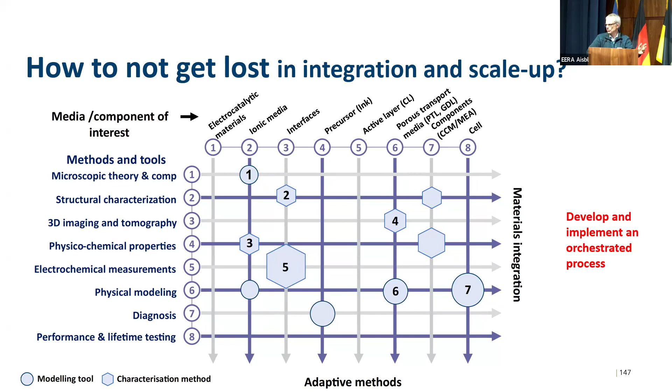So what do we have? We have a lot of areas of interest which could support our activities, and a lot of tools and methods we try to improve, for example microscopic theories, structural characterization, and so on. It's a lot of information, and we need to bring this together. How? Again, an AI system can help us, but the AI system needs a database which is readable by an AI system—so you need a certain ontology, and this is of critical importance.

If we collect this data from a lot of experiments in a structured way across our community—and we are a large community with all our infrastructures—we could try to implement certain AI related ontologies. Then we can discuss building new foundries on other topics as well. Decode is here working on this with PEM electrolyzers.

And then the advantage at the very end is you go to your computer, to your AI system, and say, okay, I would like to have a certain quality of economics, performance, and you choose, and you can vary. And then finally, at the end, you get an optimized device, if it really works. But it needs research to do this.

At the moment, I'm only aware of these two projects, BigMap for batteries, with a lot of funding - they will have 40 million euros from the EU, plus in-kind support from participating organizations - and the smaller-scale Decode project, relative to BigMap.

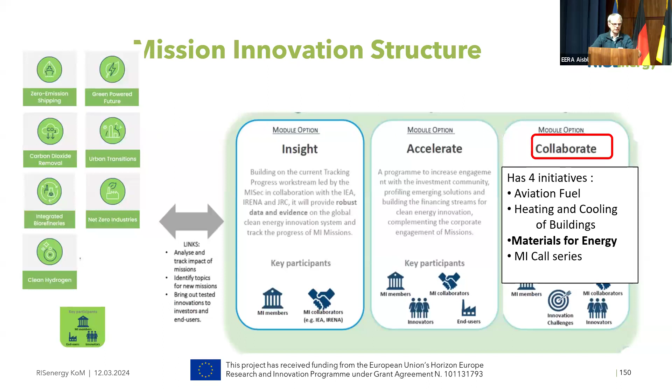This one, materials for energy, has the objective to push MAPs forward. In Mission Innovation, there are always co-leads - at the moment we have Canada and Germany, and I am the German co-lead.

The Commission will join soon - this is not official yet, but they will come. Me and Mark Kozdras, the Canadian co-coordinator, focused basically on research activities to bring them together in Europe and Canada, and somehow this worked, and we made slow progress.

The Commission now has a focus to make materials research aware on the highest policy level, which is of real interest also for me, because this might mean more funding here, and this is an opportunity to have new foundries in other areas too, for PV, for other things, alloys, whatever. We should not let this chance pass.

Okay, this is what we have on European activities at the moment - the BigMap project, Decode. The Helmholtz strategy roadmap on materials is completely focused on MAPs, meaning these MAPs are also used for non-energy applications - medicals, plastics, any other materials, completely, really completely. Then we have a German-Canadian Materials Acceleration Center, supported by the German BMBF and Canada with 6 million euros.

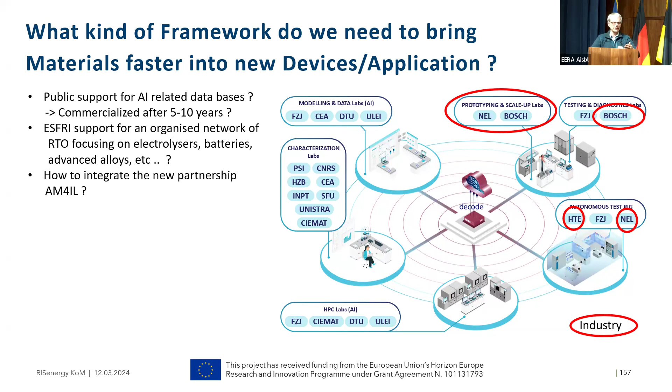That's it, basically, what I want to say. So if you have good ideas, please come to me about how to bring the industry together with our materials research. We have a kind of network, but there is no signature between the parties, and this is what we need if you want to establish a database. Thanks.

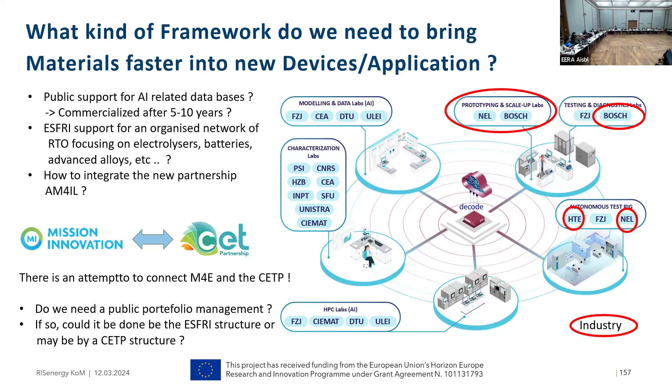Thank you, Holger. Actually, these activities we are expected to contribute to, and we also have 3 tasks in work package 3 which are somehow connected to these activities. So it's an activity we are actively considering here as well, and it's much more going on in the international scheme.

Are there questions, burning questions for Holger at the end of a long day? Everything was clear? Come on with your ideas.